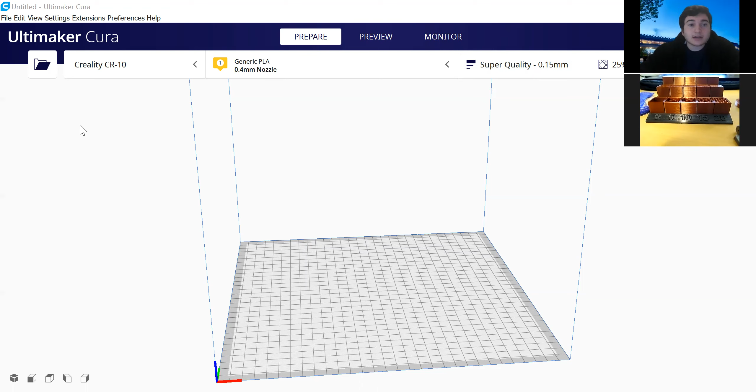So right here to start off, this is what it looks like when you open up Cura for the first time. Basically, you're going to want to either import a model that you've been working on in a specific CAD software, such as Onshape or Solidworks.

So to start off, I'm going to import a model that I have designed, and I'm just going to find it real quick. The model is obviously, Halloween's coming up, so I designed a quick pumpkin.

So I'm going to be showing you guys basically just a rundown of everything, nothing too extensive with the settings. I myself have not played with every single setting, but I've played with only a few settings that are useful that you would need to get started with 3D printing.

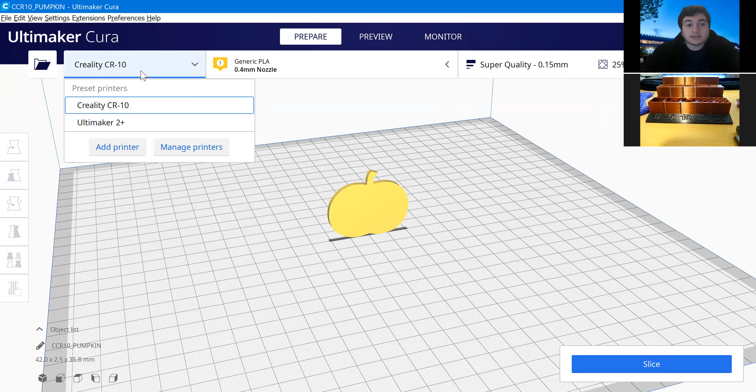So right here in the left-hand corner, that was to import a model, which is this little folder over here. Then the next step is obviously to select what type of printer you have. You can add more printers, but for now I have either the Creality CR10 or the Ultimaker 2 Plus, which is what we have at the 3D Printing Club.

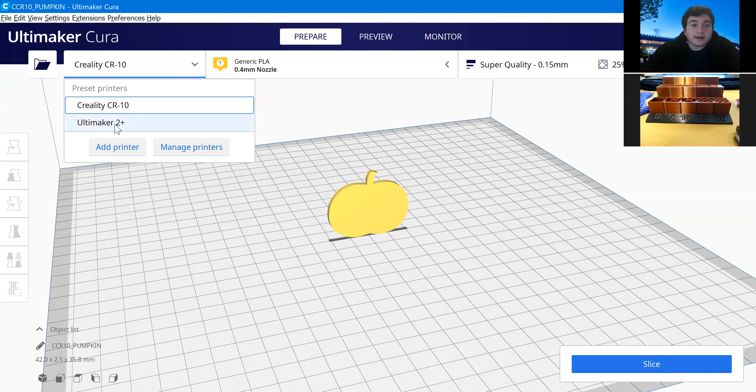Where we're located is in the engineering hall, and that's the printers they have available that we're using with them. So right now it's selected as the Creality CR10, which has a huge build plate volume, a lot of space to work with.

So I'm going to switch over to the Ultimaker 2 just to switch up and show you guys that, with each printer, it is a little different. And as you can see, the volume decreased a little bit because of the size of the Ultimaker.

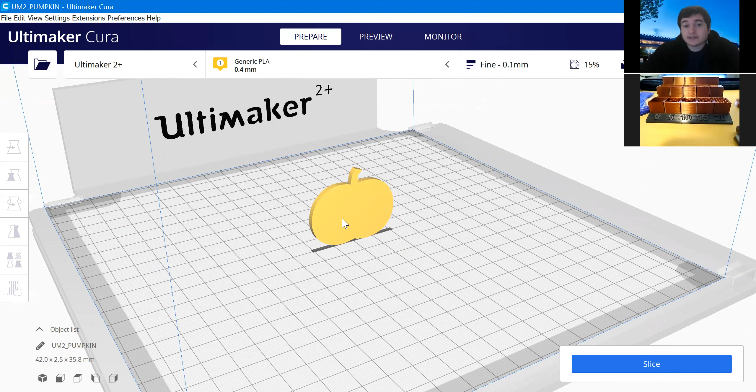So now, pretty much you can slice this model right now, standing up like that. But that would not be the best or most optimal way of going about this, because if you were to slice it like that, it may increase the time, depending on your infill settings and other factors too. Personally, if I see a model like this, I would like to flip it and rotate it, which I'm going to get to in a second.

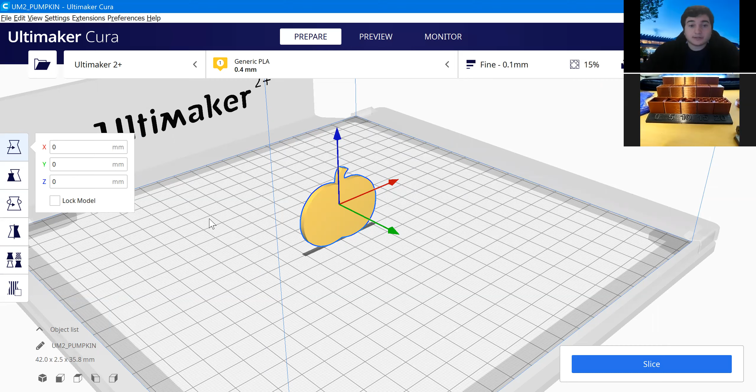But now I'm going to show you guys this left-hand panel over here. The first one on the top is to set the position of your model inside the build plate area. Right now I have it set to the origin, which is 0, 0, 0. You could obviously move it around to any specific spot you're thinking or that you would want to do.

One tip that I recommend, I recently found out, is if I were to move this into the negative space of the build plate, the model would actually start printing about halfway through the model. So whatever is on the positive z-axis going up is what will be printed. It's useful if you want to do cutaway models.

So say you have, for instance, an apple or something, and you want to see what's inside it, but you don't have software to cut it in half, and it's already a pre-done model. You could just put the apple halfway down, and it will actually split in half for you. So it's one way to manipulate that setting just to get an extra feature out of it.

So next, here's the next setting, which is basically to change your measurements and also scaling. One thing that I like is it has a feature called uniform scaling, which is very useful when you don't want to really go crazy with measurements.

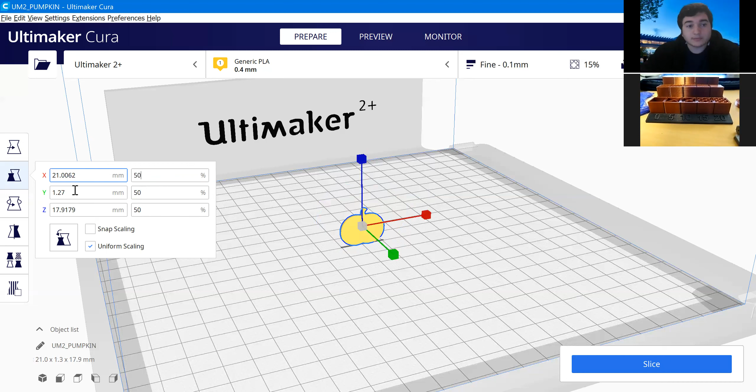Or even if you mess up on something or something doesn't look right, you can scale everything to the same size, and it will auto calculate it for you from whatever measurements you currently have. So if I were to set this to about 50% for scaling, it would automatically scale all those measurements to about 50%, which makes it very useful when you're trying to do things quickly or scale up or scale down things.

So I'm going to reset this back to 100. Currently, if you uncheck uniform scaling, you could change each of these individually, and you could also change the scaling for each axis.

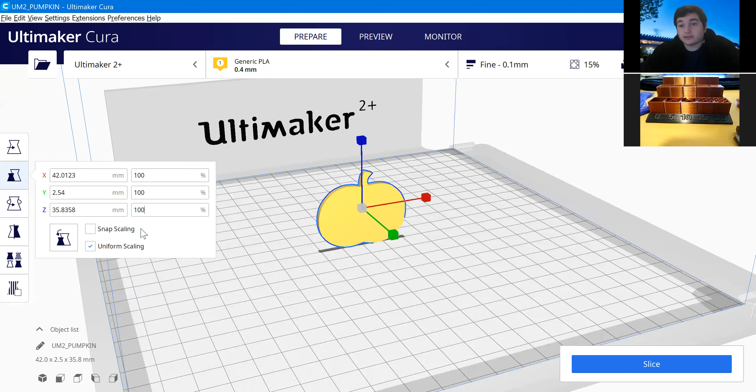One thing I did run into during the workshop with a few students was someone asking if it's possible to change this from millimeters to inches. I'm still trying to figure out how to do that. I've always worked in millimeters, so I haven't really had that issue. I believe Cura automatically converts it, so if you made a part in inches and uploaded it to Cura, it would convert it to millimeters. I'm not too sure, but I'm going to look into it and get back to that student, and I might send an update email attached to this.

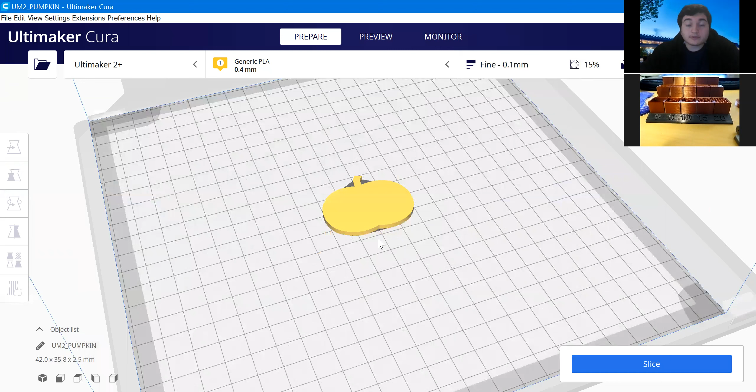So the next setting is very useful. It helps you rotate your model, and that's exactly what we're going to do here. We're going to rotate this model by grabbing the red loop going around and rotating it 90 degrees, which will lay the model flat for us, making it a lot easier to print.

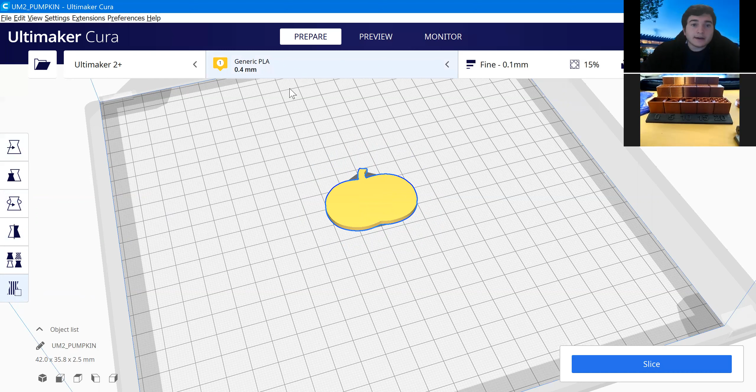Now, there are 3 more settings down here, and I'm still playing around with them. I haven't really experimented with all 3. I've only experimented with this one over here, where you can play around with different infills and stuff, but basically the main 3 you'll be using are the top ones over here. Those are the primary ones you'll be using.

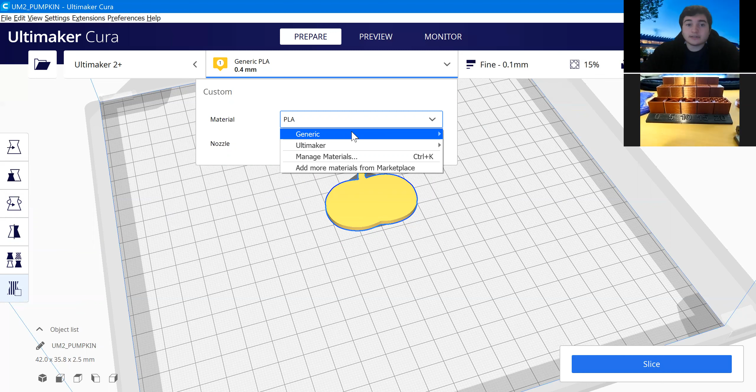Moving on, the middle bar over here is pretty standard. You're going to want to select what type of material you're using. Most likely it's going to be PLA if you're starting out with 3D printing, but if you want to move on to more complex projects, or make your models withstand specific environments, you might want to move up to ABS or even stronger materials like nylon. But you're obviously not limited to what's here—you can add your own materials and whatever comes to mind.

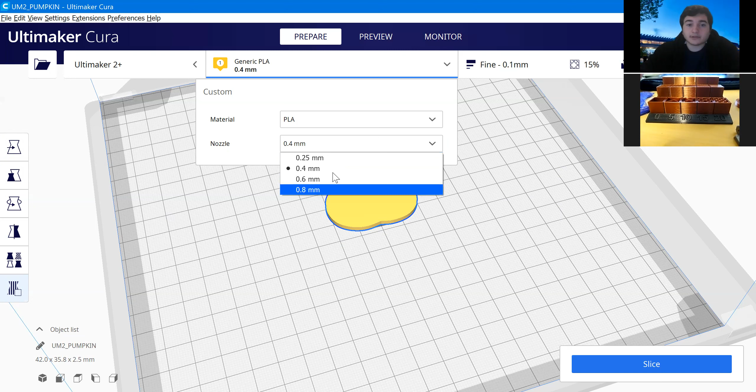So next is the nozzle size. Nozzles are pretty standard for whatever printer you have. I believe on the Ultimakers it's 0.4 millimeter, and also on the CR10s it's 0.4 millimeter. So that's a setting you don't really have to play around with—you could just leave it as is. I would think that later on, if you want specific quality adjustments for your prints, you'd go with a different nozzle diameter. But for now, it's going to be set to 0.4 millimeter.

Okay, so next, this is actually the main menu. This is like the simplified version of it—it just gives you a brief overview of everything. It doesn't really get into the nitty-gritty of everything. This is basically what you'll be using, what I would recommend using when starting out. The other settings, you might want to leave alone until you do more research on them.

Starting out, this is actually the layer height. Layer height can be thought of almost like building a brick wall—how tall do you want those bricks between each layer? That's the layer height. When you're looking at 0.2 millimeters, whatever's to the left of that will be finer quality, meaning less layer height difference, so your parts come out smoother. Whatever's to the right would come out more rugged, with visible layer heights. Generally, I'd recommend 0.15 millimeters for the CR10. For the Ultimaker, the current setting already preset by Cura recommends 0.1 millimeter, which is pretty standard for this printer.

Next is infill, which is pretty important when working with models. 0% infill could be thought of almost like a soccer ball with no air inside—you just have a shell. And 100% infill could be looked at like a whole cake: it's heavy, you can feel it. Pretty much it's like the density—how dense do you want this object to be, with lines going through it. You can obviously play around with numbers; you don't have to stick with increments of 20, 40, 60, 80. You can do in between, like for example 22% infill.

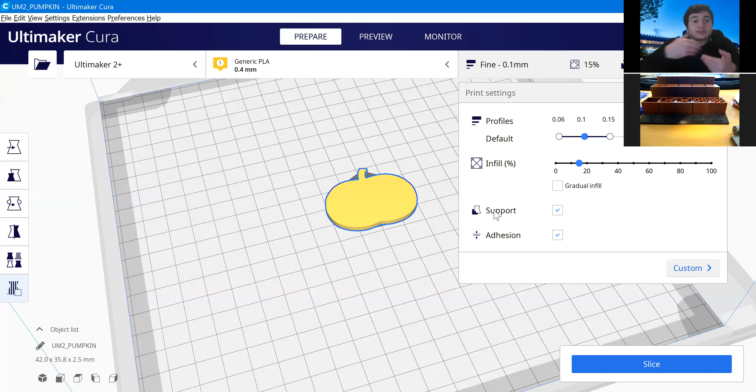So this kind of solves that issue. You pretty much print a filled-in perimeter layer first, and then print your model on top. So it makes it stick with the filament that you have. It makes things a lot easier.

So now I'm going to go a little bit more in depth into all the other settings that are currently there. I'm not going to list everything, but I'll go over what I think is really important when starting out. So obviously we mentioned layer height -- you could also access that here for quality.

Shell is pretty important. Like I mentioned before with the 0% infill, like a soccer ball, you can determine that wall thickness, how thick you want that wall for the soccer ball. You can change that setting here -- how many layers of that soccer ball do you want. It's almost like a soccer ball within a soccer ball, really close together, or almost like cardstock in a sense, I guess.

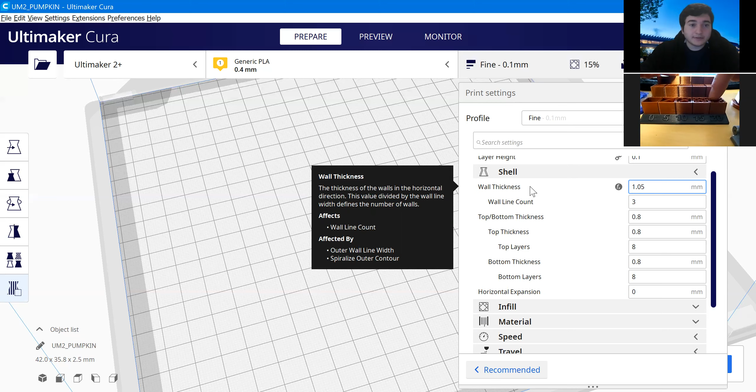Another thing that's really important, which I recently used for the model I'm going to show you guys right here, is top and bottom thickness. One thing is top layers -- you can actually shave off layers of your model to not print on the top or the bottom. So these were actually solid cubes -- if you can see right here with my fingers, these were solid cubes. You couldn't actually see these infills.

So what I did was take the top layers and set it to 0. That just took the top layer completely off -- whatever layer was on top, eliminate it, and that way you could see inside the model. With the settings, you can tweak things to get what you want or expect from your models. So infill -- I already went over infill density, but I'm going to go over infill patterns.

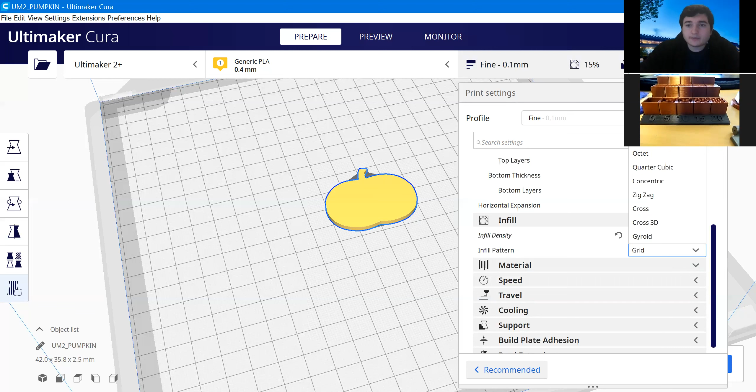So there's a lot of different patterns. Right now, the one I'm going to show in this model is grid lines. There's obviously a lot more infills you can use. I haven't tried them all, but I remember watching videos that said some infills can compress models a little bit, giving them a bit of flex even though it's PLA and not a flexible filament. Other patterns actually increase the strength. It depends on how you're printing it and what type of part. Different infill patterns will also increase print time, depending on how they print and their complexity. But for the most part, I'd stick with grid for now. It's pretty much the standard one.

So materials - yeah, I'm not too sure why that tab's not working, so I'm just going to skip over it.

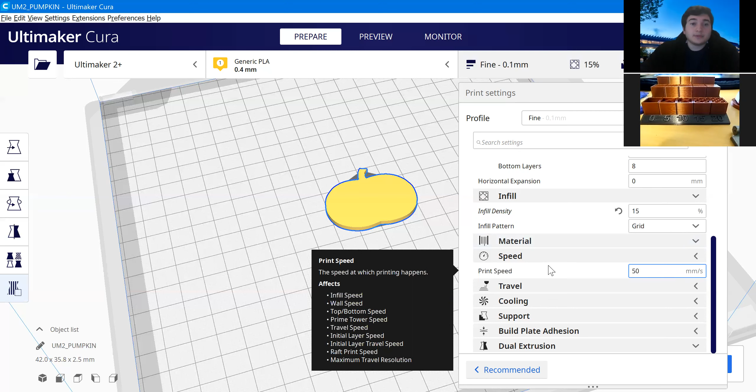So for print speed, you can adjust how fast the printer is laying down the material. I'd recommend not touching that when starting out - it's pretty much already calibrated for you at the right speed. If you're doing a more complex part and want the printer to take its time laying out material, maybe slow it down. Or if you're in a rush and want to prototype something fast, increasing the speed might be your option if your printer can handle it. You'd have to test it out first.

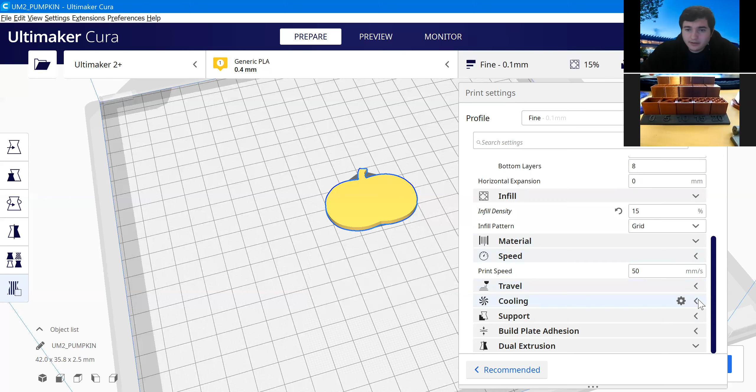For travel, I haven't really played around with these settings, but one I've seen is enable retraction. If you use filament that's exposed to air, it gets moisture in it over time - I've had this happen at home with my own printer. If you're printing, say, two pegs or prongs, the printer would go in between them and leave strings if there's moisture inside the filament. Enabling retraction kind of eliminates that a little bit. I'm not sure exactly how, but I was going to look more into it. It does reduce the amount of strings you see.

Another setting is cooling. On the extruder itself, where the hot end is, there's a fan that cools down the nozzle and the interior component. I'd recommend just leaving that alone and not touching it.

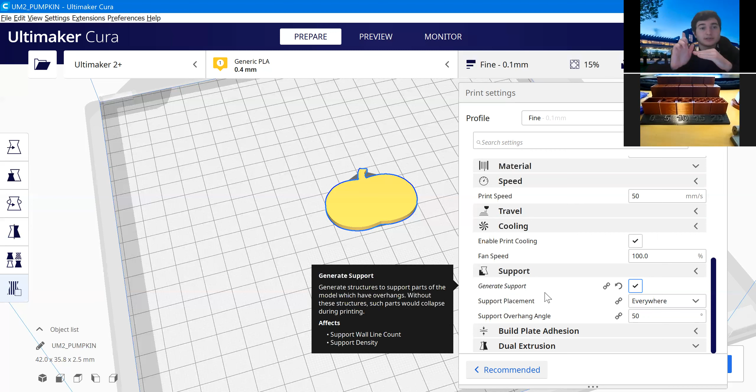Next is support. You could generate support everywhere, set types of angles, and more. I recommend leaving it as general, whatever's set right now, since it does the job when loading up a print. If you're doing something more complex, you might need a different type of support. In the last edition of Cura, I think there was something called tree support, where instead of support coming straight up, it would come out of the bottom and branch up into the model like a tree branch, touching the model to prevent overhangs.

Next is build plate adhesion - I'll show you once we slice the model what that is. Right now there are only three types: skirt, brim, and raft. They all look different, but for now I'll show you brim, since that's the most standard one I like to use.

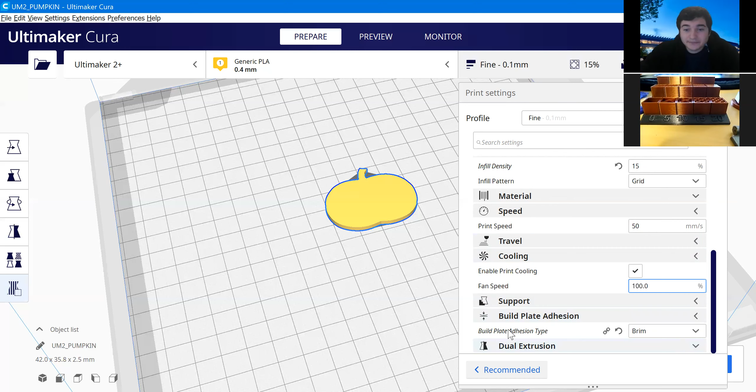And dual extrusion - we don't have that on the CR10 S2... oh wait, I'm sorry, not CR10. The Ultimaker 2 Plus doesn't have it, but we do have an Ultimaker 3, which does have dual extrusion. So you can 3D print two different colors at once, and specify where you want each color to print. It's definitely not in my budget, but it would be nice to have one of those.

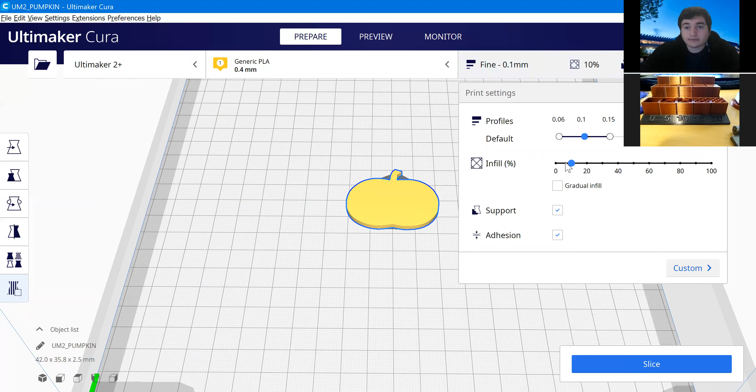So now I'm going to slice the model for you guys and show you what that looks like. It doesn't take too long to slice. Right now it's going to take about 42 minutes for this little model, and you're probably thinking that's a lot of time. Well, ways you could reduce the time include obviously changing the amount of infill.

So if I were to change this to, or go back in the settings and change this, let's say instead of 15, let's go to 5, and then reslice. It might change it down, well, sometimes it depends, obviously. It would probably work for a lot bigger models, it would reduce the time. But if it's something small like this, it's going to vary per thing. I notice the smaller the model is, the infill really doesn't matter because it's still going to print it anyway.

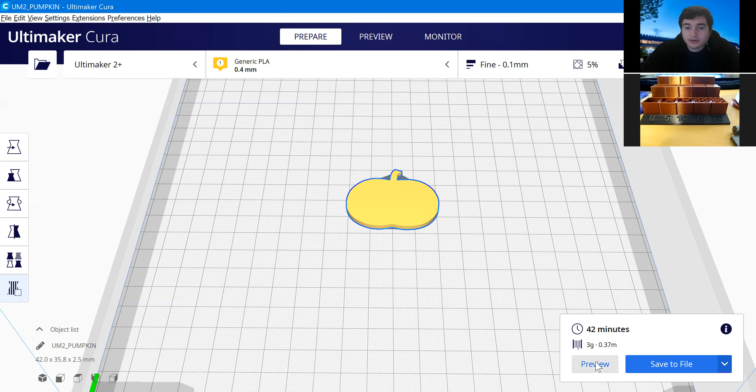So right now it's 3 grams. It tells you how much weight you're going to have, and how much length of filament you're going to be using out of the spool. One thing to keep in mind is that one filament roll is about 1 kilogram, so that's about 1,000 grams, which comes out to about 2.2 pounds. This feature is really good when, say, you have your own printer, just to keep track of how much you're using. I like to do that so you get a sense of when you're going to run out, or if you're going to do the next print and don't have enough filament. You could also get a scale at home and weigh your actual filament roll to see how much you have.

So we're going to click preview to get a look at the model. I'm just going to show you guys real quick, you can actually see an x-ray of the inside of the model. So if you have any more complex designs on the inside of something, you can see through the model. Now this is going to be the most standard view, which is layer height view, or layer view, my bad.

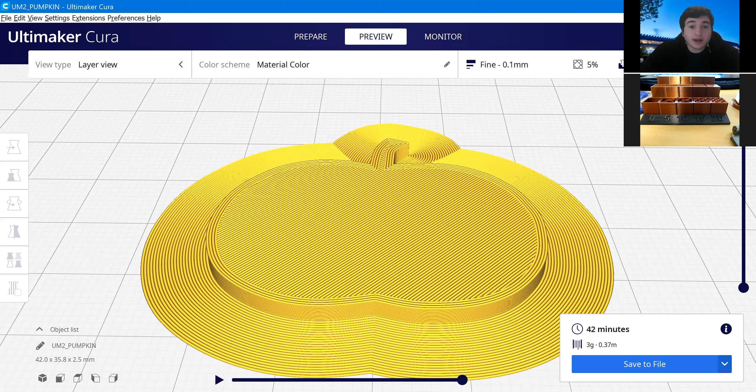And right here on the right hand side, you can see the process of it printing, layer by layer, you can go down. As you can see, those lines right there, the little crisscross pattern, that's the infill, that's how much it's going to be filled on the inside. So as I'm going down, it's reducing down.

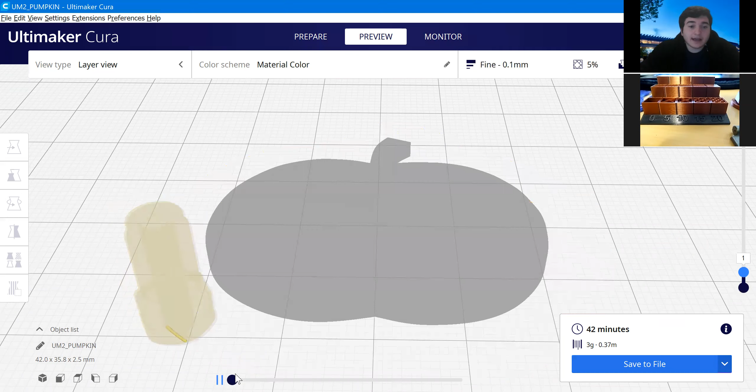I'm going to show you guys right now on the bottom of the screen, this feature is actually kind of cool. You can actually see, as the printer's printing, the path it's going to follow with the extruder head. You can speed this up just to see where exactly the head's going to be and if there's going to be any conflicts in your print. So you can almost check your prints before you even do it.

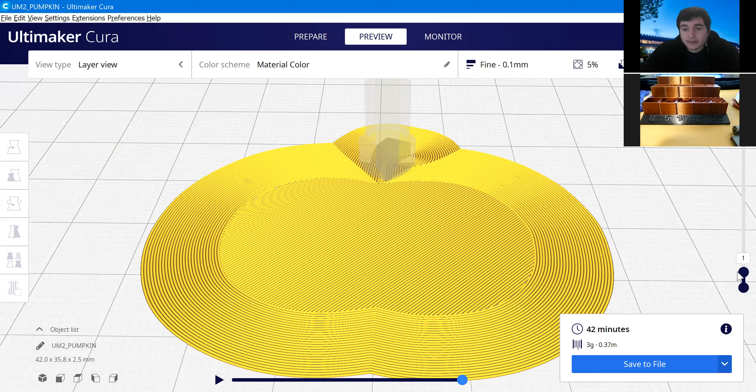So this whole layer right here, this first layer, that's called the brim. This is what I was talking about with that adhesion, it helps stick it to the bed. And then when you go to the second layer... let me move this. By the way, also down here, you could change the views.

Of looking at your print. One thing I would recommend is camera, I think it was camera position front end, and then if you change view to orthographic, it actually lays it flat. And then one thing I also found out, if you hit shift and then right click, it makes it easier to move your mouse around the screen. So you can actually view it as it's going to come up layer by layer, just to see if there's any conflicts with the print.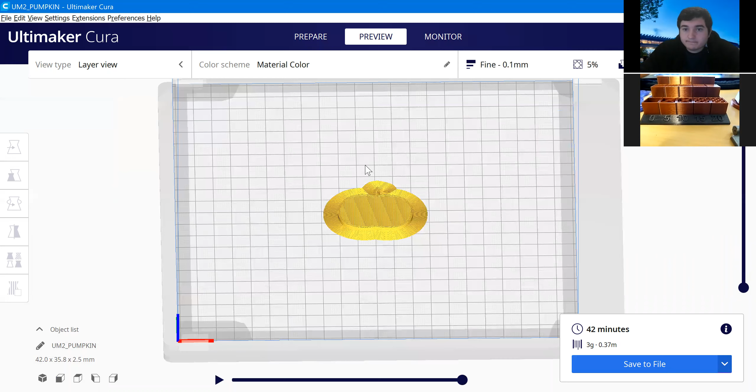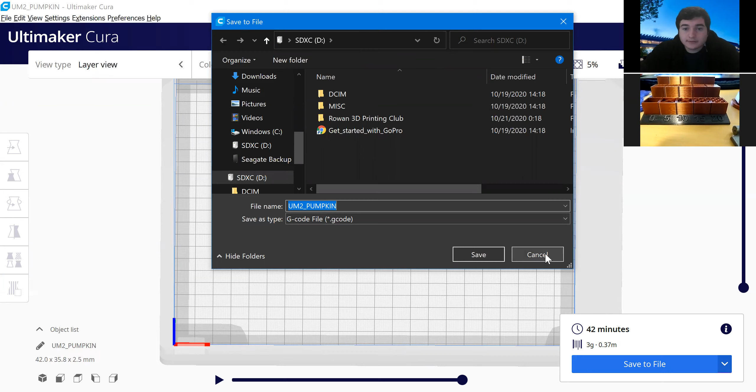So yeah, and then the next step would obviously be to export this. It's going to say UM2 for Ultimaker, and this will export as a G-code file. So it's not the same as an STL. Pretty much a G-code file is the instructions that the printer uses to actually map out your model and create it. So if you were to use a CR10, it would be CR and then 10 and then pumpkin.

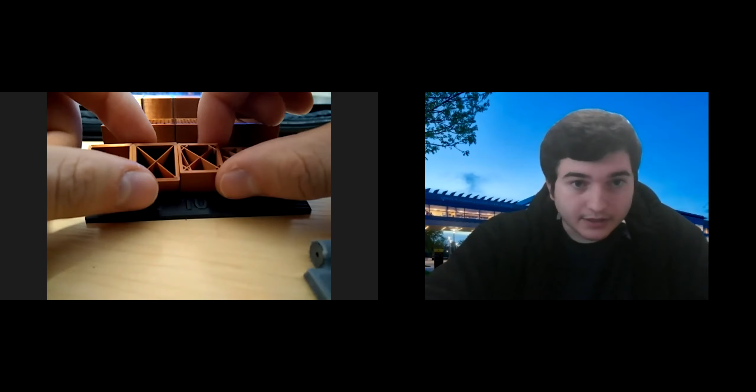So right now, what I have here on the screen is all the different types of infills, just going up in numbers. We have 0% infill, obviously there's nothing there. We have 5%, so I'm just going to try to show you guys these. Move these up just a little bit. Okay, just put these here.

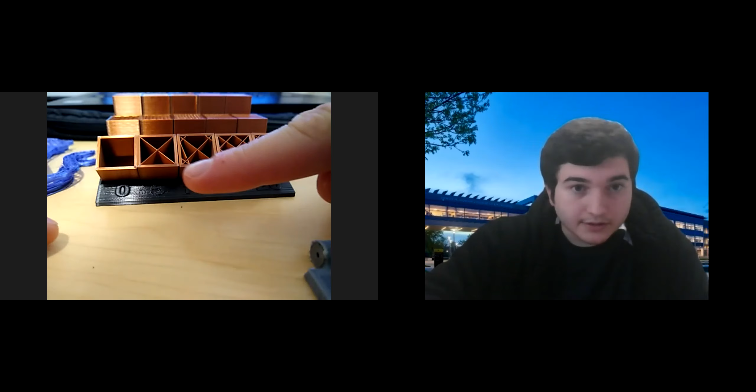As you guys can see, it does get a little more structured on the inside as it's going. And as you increase the infill, you get more of a solid part, so there's less room for it to crack, to break, to fracture, anything. And as you go higher, this is a 25, then 30, 35, 40, 50.

At the top here, I'll take these out to make it easier to show. Then we have 60% infill, 70%.

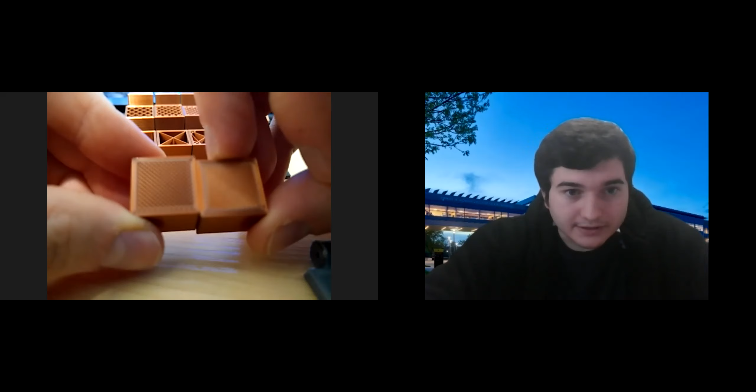I'm just going to skip over and show you 90 and 100, so you can really see the fine detail. You can see one's a little darker than the other, because there are little pores going through there. So that's 90 to the left and 100 to the right.

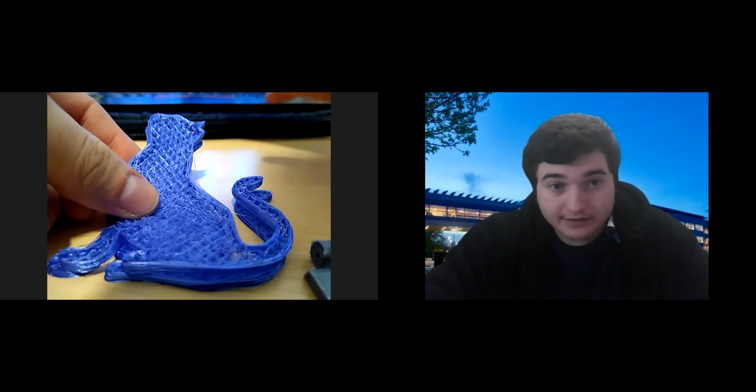One other useful thing we discovered when printing a test model was that one of our failed prints actually gave us a little demonstration tool. This was supposed to be a solid cat with about 25% infill. It did fail, and we're still trying to figure out why — we believe it's the printer, not necessarily the software end.

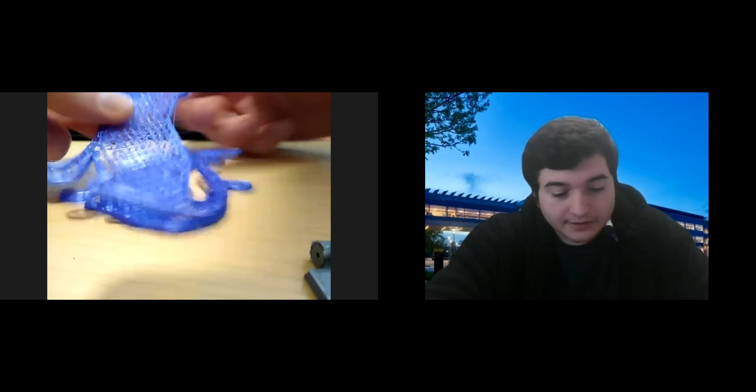But yeah, you can actually see the outline of what the infill looks like. You can see that the less infill there is, the more squishy it is on the inside. You can get a feel for it — it almost looks like one of those wafer cookies a little bit.

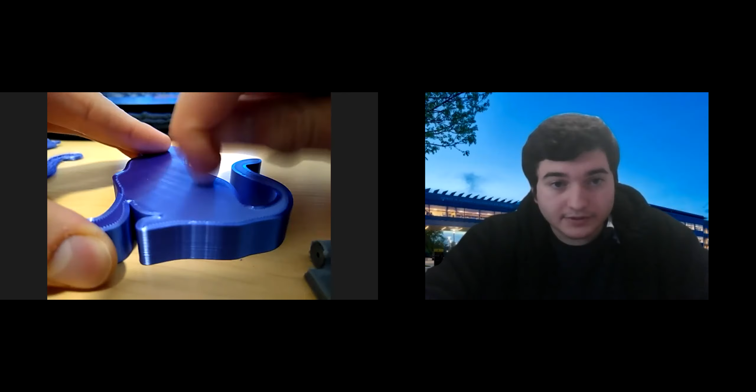So now, one last model I'm going to show — this is also the model of the cat after we fixed the printer. We redid it, so it's a lot more solid, and I think we increased the infill by about 30%.

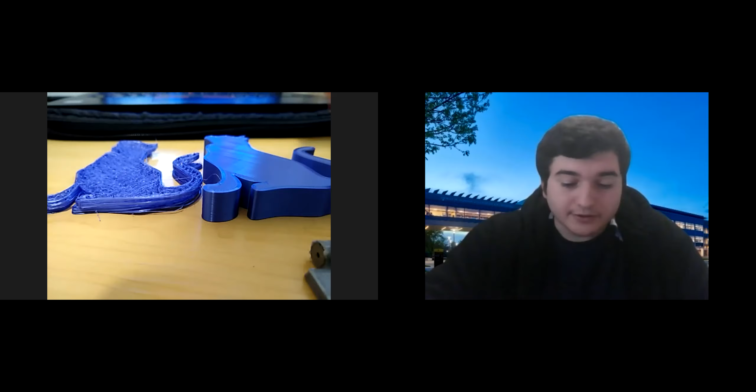So you can really take a look at the before and afters. This is like what's on the inside — obviously it's not going to be that jumbled up, but this is what a solid model looks like. There's not really much room for it to break or to snap.

One more model I'd like to show you guys is actually what we used previously for our ASME, WIE, and 3D PC workshop for Solidworks — the class you guys went to on Monday and Wednesday, I believe.

This was actually the bottom half of the model you guys did — this is the rotating part. As you can see, you can actually make parts that fit together, and this was printed all in one print. It wasn't two separate pieces, so you can fit your tolerances together and have a solid piece that actually rotates, or anything that sticks together to itself.

So this is what we'll be using for the pencil holders you guys designed. This is just the bottom half, just to show you that it's possible to print one solid print with a design that you have.

So that's just a rundown of Cura, and a rundown of everything that we have.